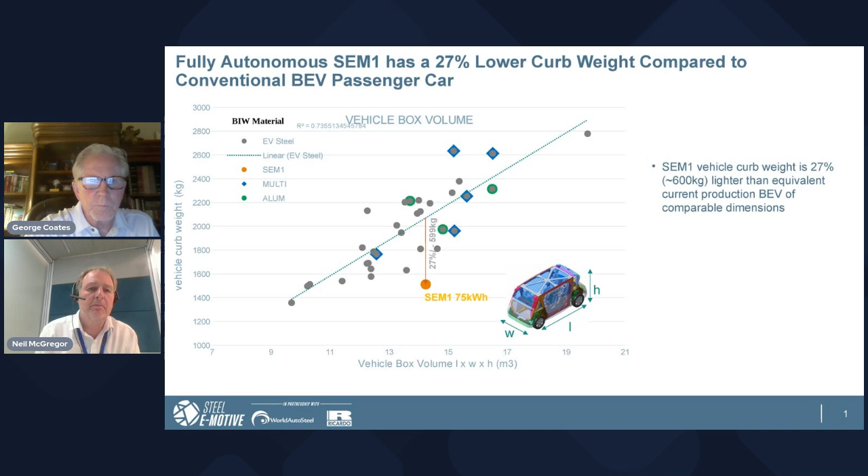The question that everyone always asks us is, that's great, but how did you achieve that, and why was that achieved? So maybe if you go to the next page, George, this essentially answers that question of why is Steel E-Motive so much lighter than a present day production battery electric vehicle, and this weight walk shows that.

So firstly, Steel Emotive is a future hypothetical vehicle. The production date is 2030, 2035, which is when we expect the autonomous systems and autonomous legislation to be mature enough to roll out these vehicles in mass production. So we looked at a future battery technology forecast in terms of energy density, kilowatt hours per kilogram and kilowatt hours per litre.

Looking at our roadmap of future technology, we estimated that a 75 kilowatt hour battery of the future would be around 140 kilos lighter than it would be today. And that's down to developments in battery cell chemistry, cell technology, and form factor. So we factored in a lighter battery in our future vehicle weight forecast.

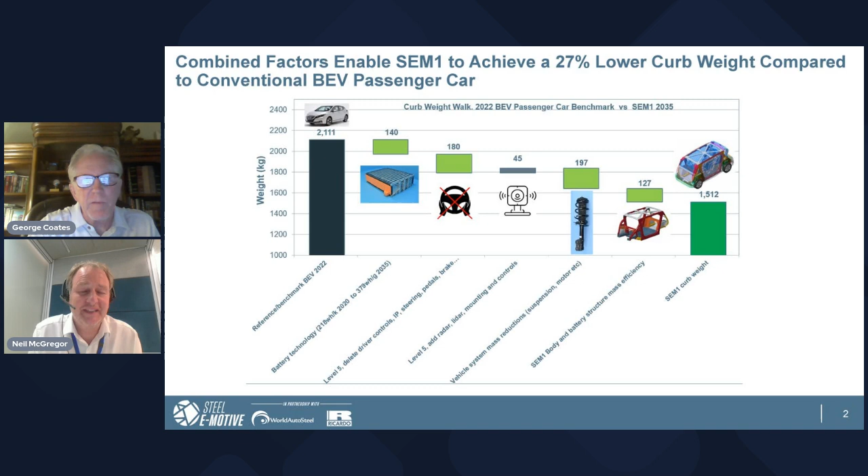Our design, Steel Emotive design, is a concept and it's unpainted, and we're comparing the data on the graph. The reference data is all painted body in white with some NVH padding included in that. So maybe the SEM1, the 282, it may be 5 or 10 kilos heavier than that by the time it

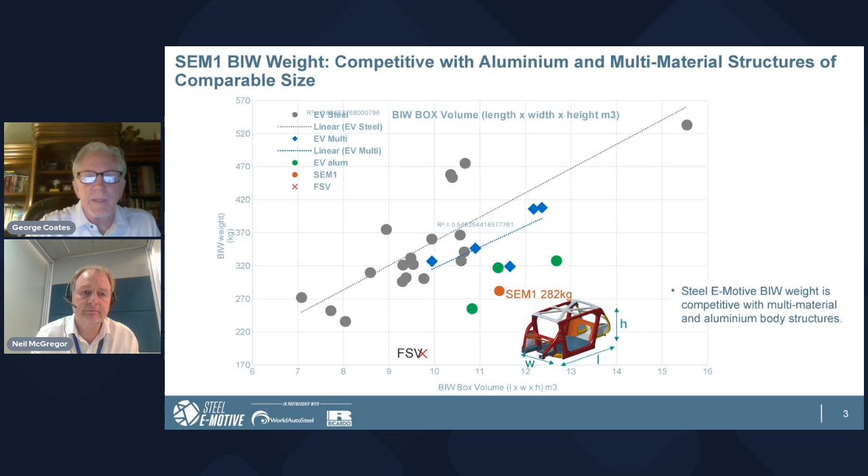Yeah. And so as we transition into talking about stiffness, I know we gave you several challenges with the vehicle targets and the must-be's, like it must be level 5 autonomy. It must have an open box kind of structure because we wanted people to be able to face one another in their seating positions. And I'm imagining some of those constraints created real challenges for stiffness. Yeah, that's right.

Open box structures typically are less stiff than a conventional passenger car, because, as you can see from this image, we effectively removed the B pillar from the body in white structure, and we put that B pillar into the closures. So that gives us a little bit of a benefit in terms of weight, but we lose a bit on stiffness. Removal of that B pillar takes away some of the contribution of the stiffness.

But what we're looking at here on this graph is a summary of the body in white stiffness performance. So we set ourselves a target of 25,000 Newton meters per degree in terms of static torsional stiffness, and these numbers should be fairly familiar to most automotive engineers. 25,000 is on the low side. Typically these days, car makers are going up to 50,000 Newton meters per degree.

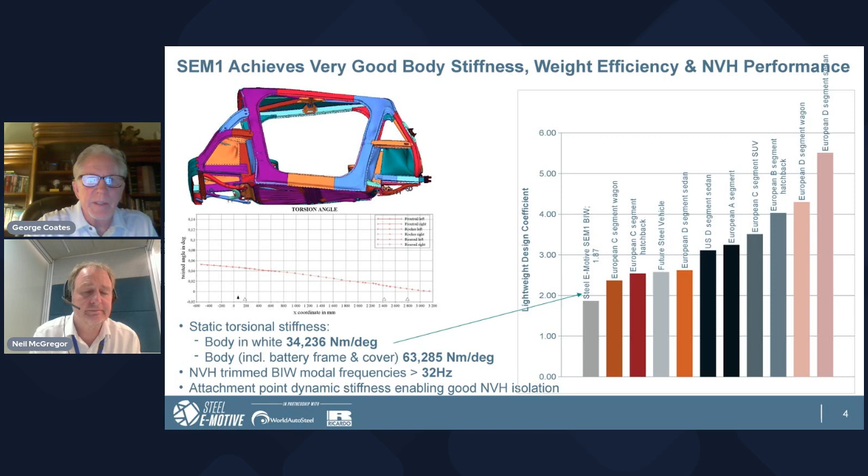Yeah, thank you. Thanks for that explanation. Okay, so this is an interesting graph. Can you take us through the design and engineering process?

Yeah, we show this good performance, and then people often ask, that's great, but how did you achieve it? So this diagram tries to show the evolution, the development of that body in white structure. Remember, the specification for Steel E-Motive was a clean sheet design, no existing structure, for a fully autonomous battery electric vehicle. That's the design brief.

So there's quite a lot of new design freedoms. There's no requirement for vision or obscuration, so we can put structure where we would typically put glazed areas. So we started with one of these FEA 3D topology load path optimizations. They're pretty common and used fairly widespread in engineering these days. But for us, we had to think about that a little bit differently.

We had to change the boundary conditions and the constraints for that simulation quite a bit to capture the subtle differences of autonomous vehicles. So we ran this topology optimization that essentially tells you where to put the material. Remember, lightweight structures is all about the right material in the right place. So that told us where the key load paths are for things like front crash, side crash, stiffness, NVH.

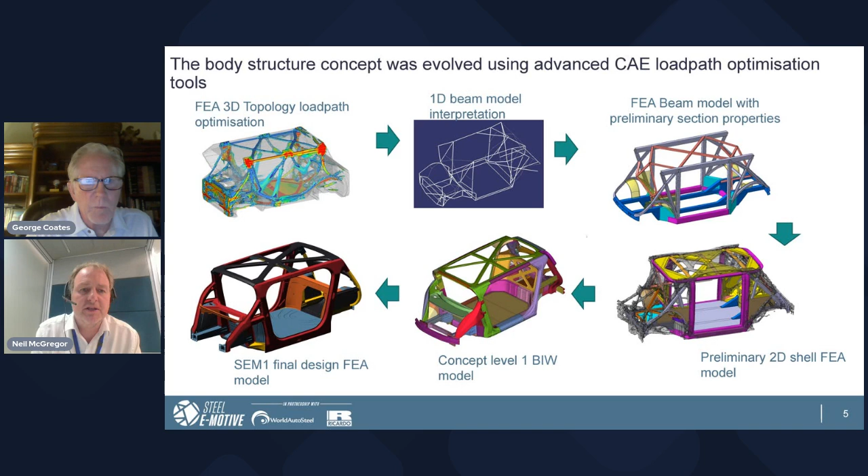Okay. So then the heavy lifting really occurs from that 2D view all the way to the final body in white. That timeline would be about? Yeah, about 18 months or 2 years, something like that. And that's the heavy lifting, like you say, which is all of the FEA iterations, the optimization. We had the great 64 advanced high strength steels to choose from, and then all the gauge thicknesses as well. So a lot of potential, but that means there's quite a lot of optimization loops to go through to get that good result at the end.

And then let's just show one illustration, and then I think we're about out of time. Okay. Yeah. So what we're trying to do here is drill into some of the detail about how we achieve that stiffness. A lot of work went into optimizing the main sections of the body in white structure. So you can see the image there on the bottom right. That's the base of the A pillar.

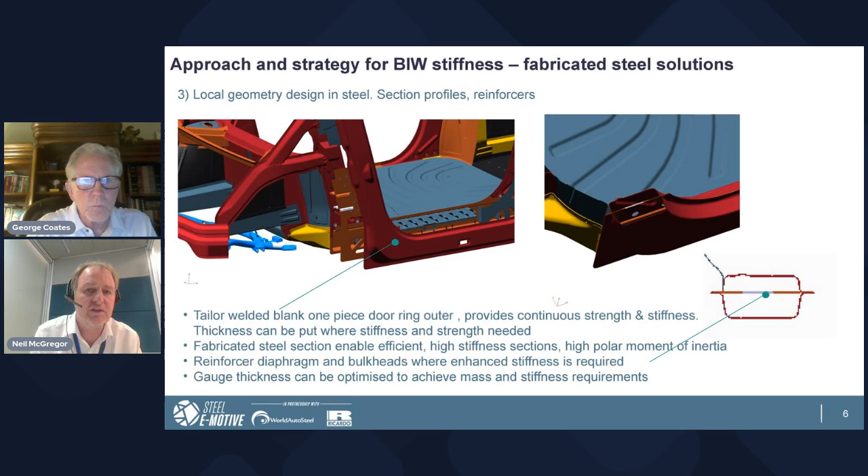A lot of work went into fine tuning the profile of that, the joining of that, the position of the spot welds, adding gusset features into the corners just to put the material where it's needed, really, and optimizing the right grades of steel and the right thicknesses of steel in there. But that's just one example. The engineering report that's freely available to anyone goes into a lot more detail about the section profiles and how exactly we achieved the good stiffness and weight result.

Okay, great. And then you just got a quick illustration on joining. If you could take us through that. Yeah, the joining of a body in white structure really does significantly influence the overall performance. And again, a significant amount of effort went into optimizing the way that the body in white was joined. For a high volume production body in white fabricated steel structure, we went with the remote resistance spot welding route. So typically around about 4,000 spot welds in the body in white.

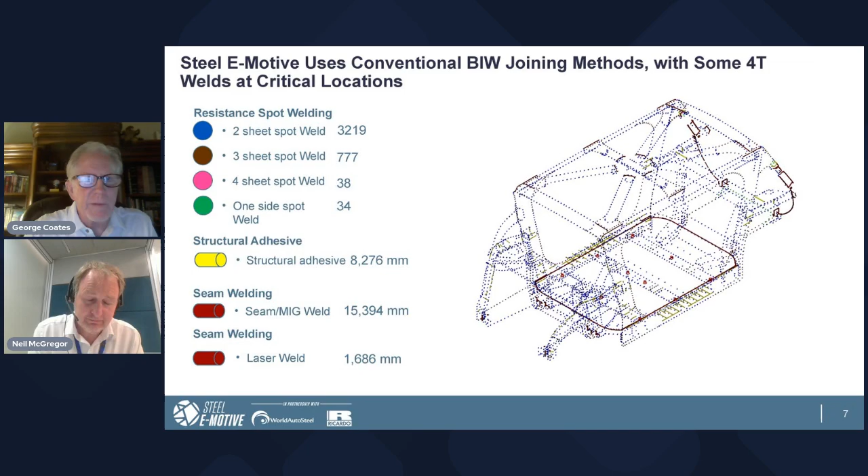Well, we're out of time, Neil. This is great. Thank you for the detailed explanations of the efforts we took to manage and mitigate weight and use steel for that open box structure to yield a really solid stiffness performance.